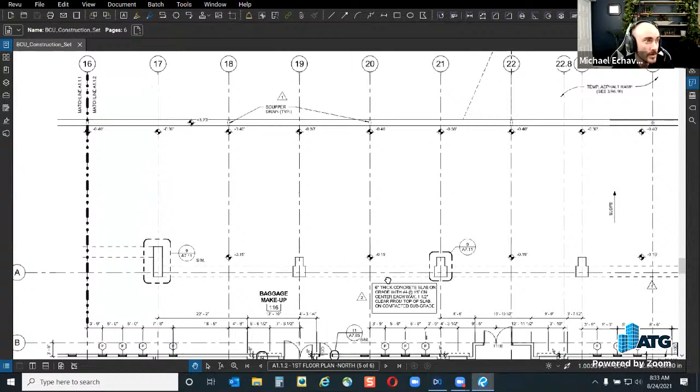But I've taken and compiled a bunch of questions, and I'm going to keep doing that as we go along, and Jason will be able to answer them and show his screen as we're going back and forth trying to answer these. Before we start on the survey questions that people have had over time, we'll leave it open for all of you. So if anyone here in YouTube world or Zoom world has questions pertaining to Bluebeam, or pertaining to who Jason and I are, or who ATG is, we can answer those too.

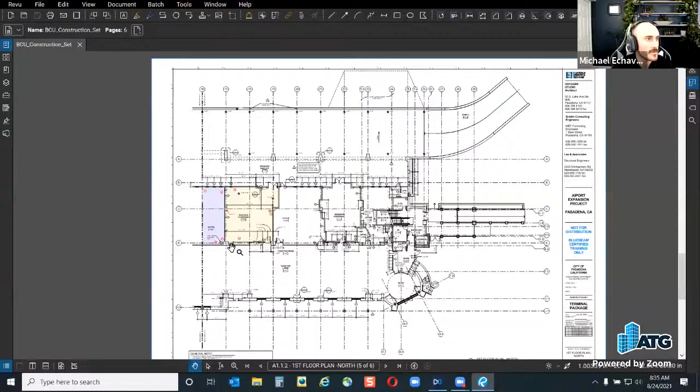I always recommend checking the DPI output right off the bat, since that's whatever the default DPI setting is. Revu is a more intensive writer for all of the metadata you're getting from your document. So check your DPI, try reducing it, see if it's not having that much of a reduction in the quality of the PDF. Usually I've seen people starting out at 600 DPI.

You can realistically get to about 350 on an export. That's going to reduce your file size a lot as well. So I would go and check the additional advanced settings from your export, from the writer software you're using. And then there are the other things Jason's going to go to.

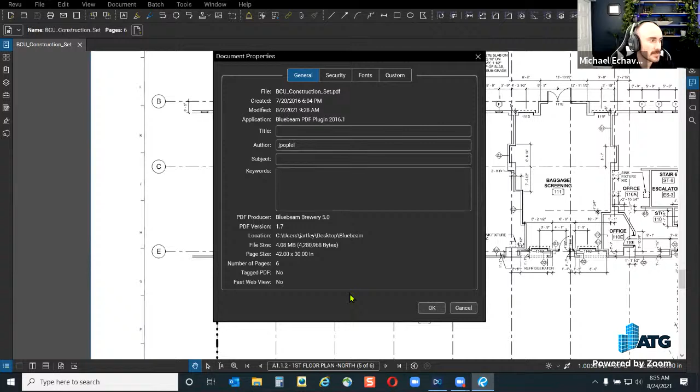So you were saying reduce file size and what else? Check the document properties. This is found under document properties. You can always hit Control D to get to this as well. And sometimes, make sure that it is an actual Bluebeam PDF. If you're using the driver, obviously it should be, but it's another thing to verify. You can also see your file size right here.

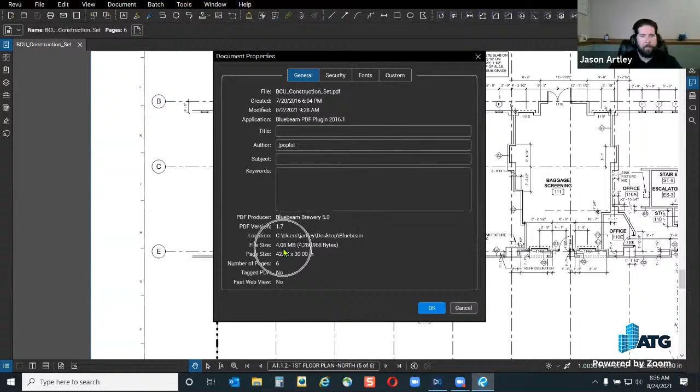All right, David, are you going to read them or do you want me to keep copying over? You keep copying over. I'm going to read David's question here. This is a good one because I don't know the answer. Let's see if you do. I'll ask you because you don't need to demonstrate anything.

Can spaces be set to capture information off of multiple sheets? So say if Office 115A here is on multiple pages, can it do that?

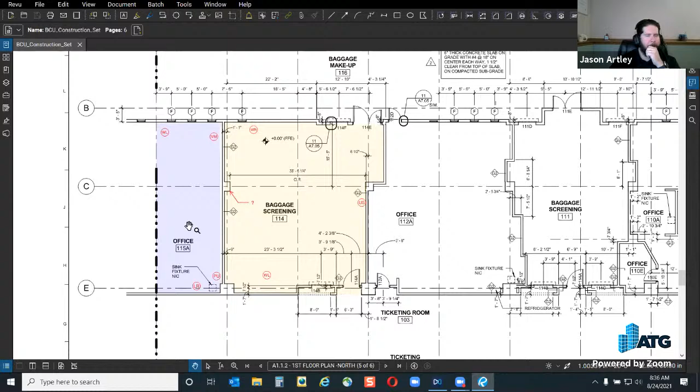I think you'd have to have it per instance. Can you have two of the same space? No, because I think even when you do the snapshot, it duplicates it.

So create a snapshot and then paste it, Control V. Just over here, it doesn't create another space, it just does that. But if you right click on it, what is it? Hold on, what are my options? Snapshot, create area measurement, delete, cut, copy, paste. Because usually it would also bring the space with it too, but yeah, it's the instance of that singular space.

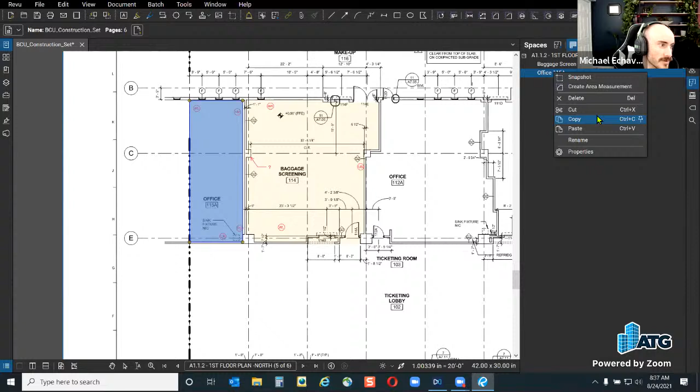It's not linked. You probably could if you knew JavaScript. Oh, there we go. So I did a copy paste of it, and look what it did - it made a one, and I don't think I can rename that to match. I can, look at that.

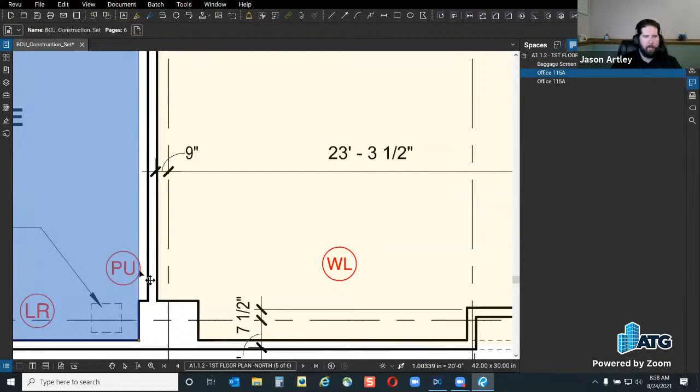But the data is not going to be - it would be two different instances in your markups list, right? Which is what we're trying not to do. Right, scroll down to your markups list. Let's see this. Hang on, I want to grab one of these markups if I can. I got a draw order issue here, or have I flattened this? What is in my markups list?

Somebody was playing - there it is. There, I moved it over there. Oh, so here, multiple spaces with the same name. It does show up the same.

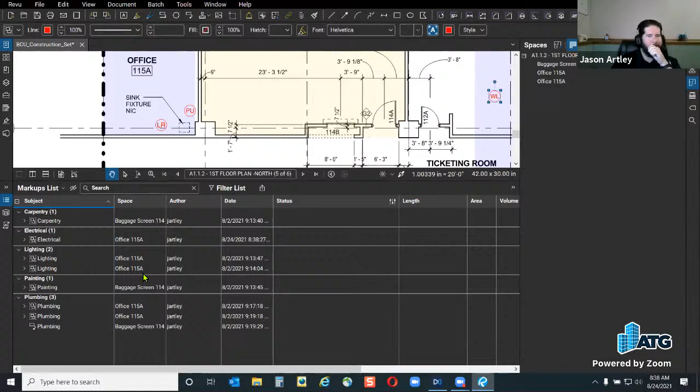So order it by spaces, though. Order it by spaces. Yeah, they all show up. They all show up in the same space. So do you think this would work on different pages? Good question. Well, if he wants them to be all together, it's still ordering them together, so yeah, it still works.

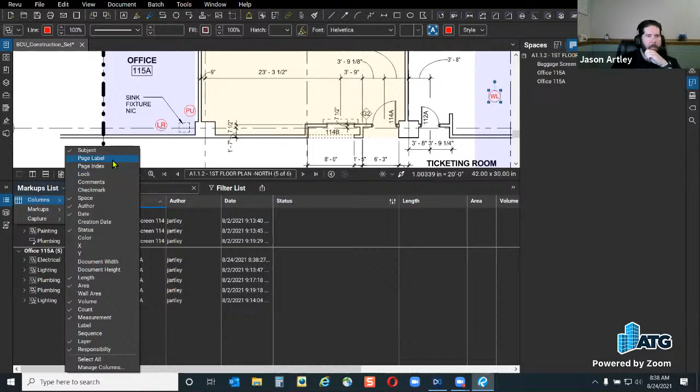True. Right, and then here, WL. Yeah, you just set your column for page index and the page label too, right? Then you can see what page it's on. So if you have multiple pages, then you can see it all there. Space name would be the same, which would allow you to work with the exported data. So if you're trying to have the same information under the same space, you name it the same, because it's still logging it under that same data.

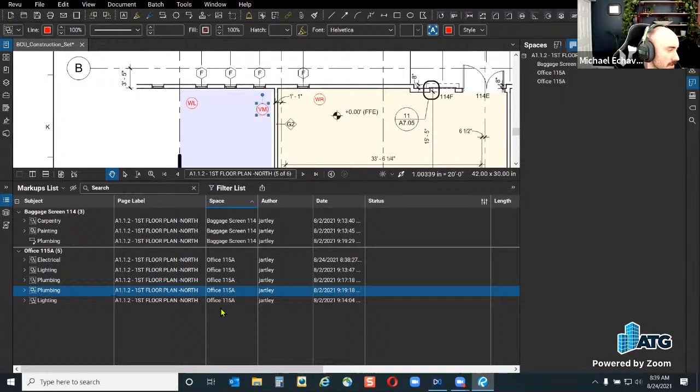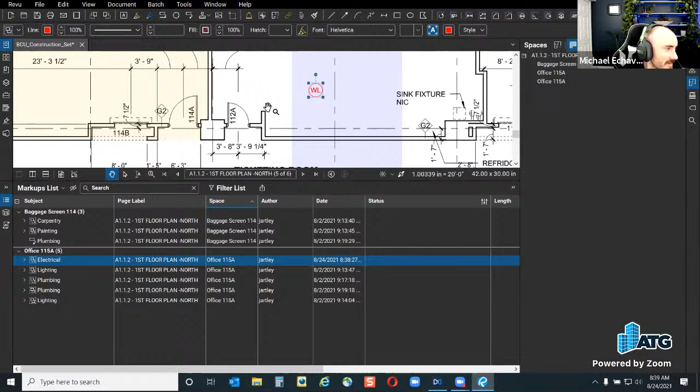Is that correct though? Scroll out. Is that - what was that? It was WL, right? What was that markup that you put in it? The WL, is it there on the left? What is that on the left, the WL? Oh, it is, yeah, it's electrical. I was looking for something with a W, but right, I know - that one throws me off. Wrong location. Wrong location.

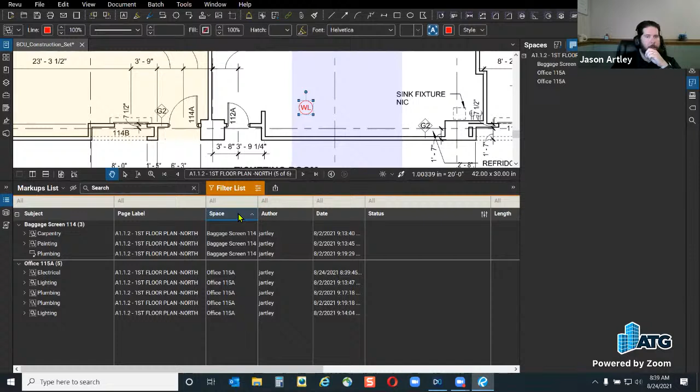So if you wanted to export the data and have it all filtered by these spaces, regardless of what page it's on, you have that filter capability here where you can just filter and choose what space you want. So if I filter, boom, only that space, and then I can create that summary.

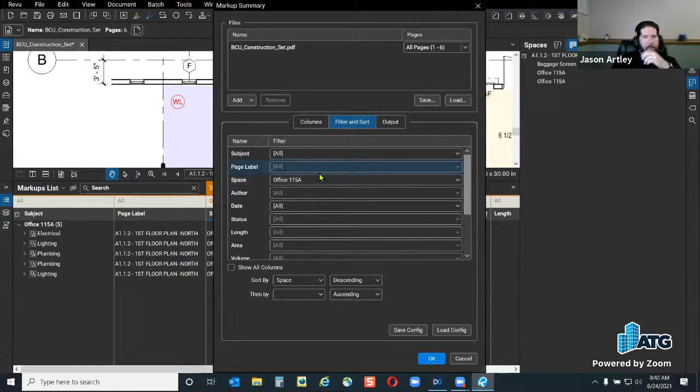If I'm doing CSV or PDF, let's do CSV for once. I can go through here, do what I need to do, include my markups, set my columns. I can turn all this off, and then when I'm filtering, it's already set to only give me the information for this office space. And there we go, so that's one way to do it.

Snapshot of the space was a nice trick too. You haven't seen that before? Oh come on, David, we do this all the time. Actually I don't — Michael does this because he works with spaces and rooms and architectural stuff way more than I do. Yeah, sometimes I'm jealous of that.

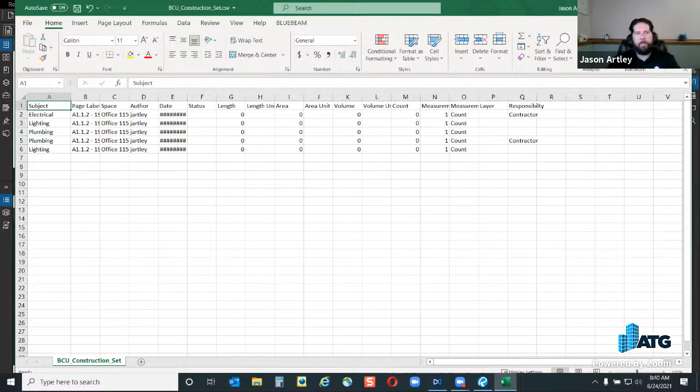Can't lie. The snapshot tool is great because you can then enlarge that area. So if you snapshot it and you want to make an enlarged area plan of something, you can just snapshot it and then make it larger than it was by extending it up. So again, it's a great tool.

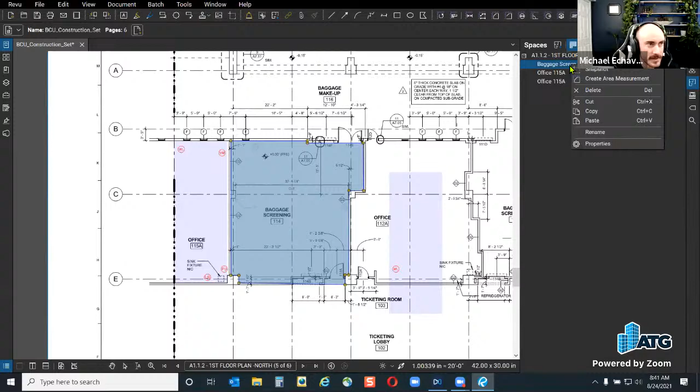I'll grab my baggage screening snapshot, and then I'll go to another page where I have a little bit more real estate. Do I have a page with more real estate? Probably, just insert a blank page.

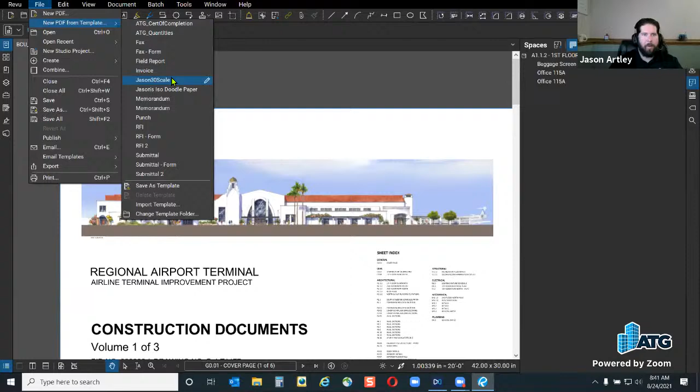Oh, let's do this — new PDF from template. Jason's got a 30 scale. Boom, I'm going to drop this right in here. Look at that — now I can have my full detail.

Yeah, and you can scale enlarge this. There you go. And since I have measurements here, I can still calibrate and scale this accordingly. But this template that I use is already set to 30 scale, so I could have just dealt with it.

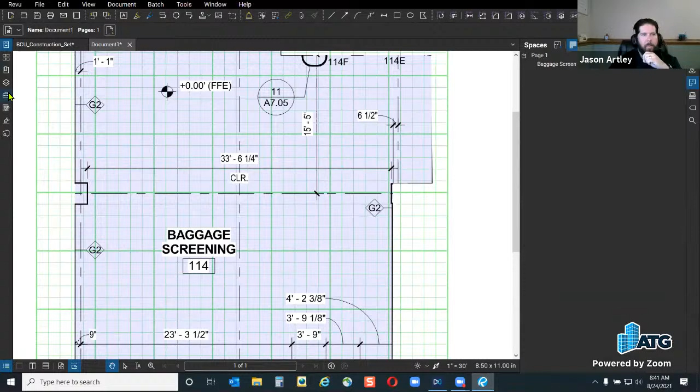Now I can go make whatever I want as far as other doodles or detail, or inserting fun things like people, because people like to walk around in baggage screening and they're usually in my way when I'm trying to go get my bags. Funny how that works, right?

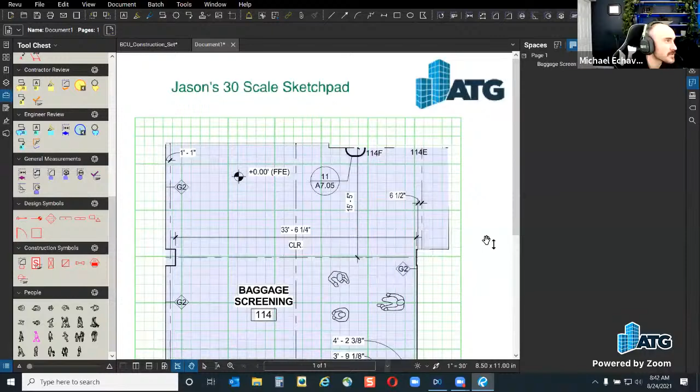Okay, first one is: Control K menu — what does it all mean? I don't know. Okay, this is going to be a fun one.

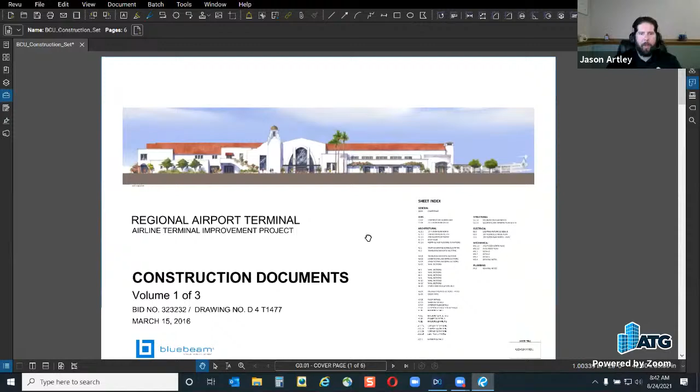Ready? Control K — anybody know what this does without cheating? All right, Control plus K. Here we go. Oh, it's just preferences, man. I would've thought that one was Control P. Again, I really try not to learn hotkeys because I will always use hotkeys, because I'm that guy. But if I'm using hotkeys, that's not explaining what I'm doing.

So we just opened Pandora's box. Let's go for a trip down the rabbit hole, everybody. All right, hands and feet in the vehicle at all times, make sure your tray tables are properly stowed. This is the preferences, and there's a lot in here. And for most people, you don't have to touch anything.

So I'm going to do this in two ways. First way, I'm going to show you the things that most people should mess with. Then I'll stop there, and we'll come back into it and go deeper down the rabbit hole. All right, so when you first open your preferences, you're going to start on the general option, and then you have more options here. So in the general tab, what do you call these tabs?

General section, and then options, document, navigation, grid and snap, and spelling. I call them tabs. So in general, on options, the first thing that I recommend people do is change your username — so 'Jartley,' that's sort of a nickname, it's my thing. If I put my actual name there, this is what shows up in the markups list.

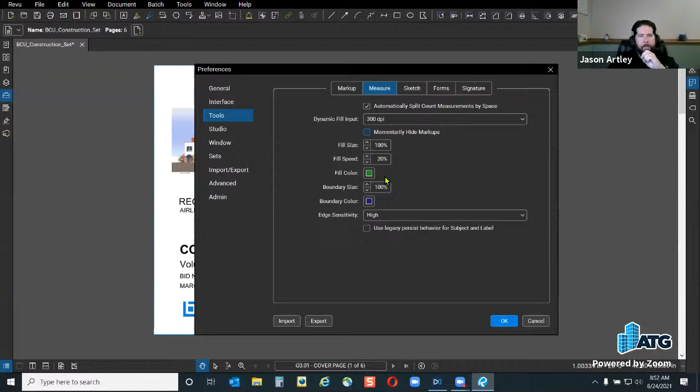Fill color, green, boundary color. Some of the stuff is kind of silly. Sketching, and then our forms. Again, forms is an extreme only function.

Here in Studio, attempt to check out files on open. Don't do that one, I don't recommend that. Enable flashing effect, this is a good one, but if you're sensitive to flashing, you can turn that off. Nice of Bluebeam to include inclusionary options.

Open and save from toolbar only. Force proxy views, I don't know what that means. Open project documents in split view. This is a toggle, right? So when you open a project, it will say, do you want to open in split view? So if you set this, that option won't pop up.

And then here you have your servers.

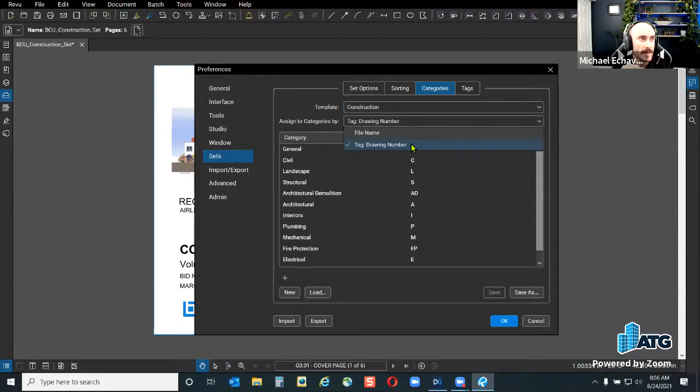Create your own categories—again, save it, export it, share it with your team. Everything ready to go. You can export these, and these categories are specific to your sets, by the way. This is only for sets, when we're creating sets, and that's virtually combining—it's proprietary to Bluebeam.

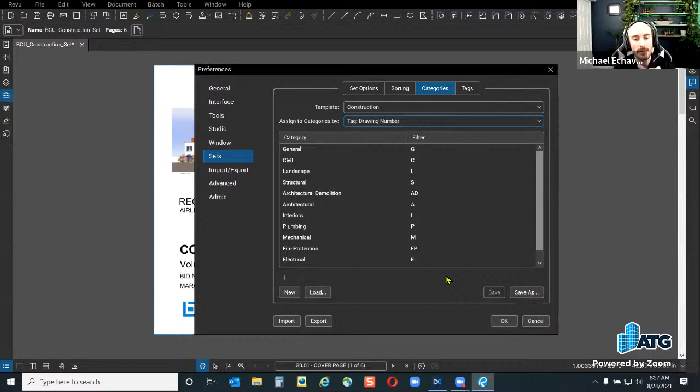It's virtually combining your PDFs into one set, but they're not really together. Majority of the time I'm having clients do this is because the set is too large—file size is too large, and it's hard to render a lot of PDFs when we have, I don't know, over 250, maybe 300 PDFs. How can we separate them out as individuals? Doing sets is what I always recommend, and that's how we would do that.

So once you have this set up the way you like it, all you've got to do is hit save as here, and that will create an XML file, and then you can have that set. Here's a construction set that comes with Revu, but if you wanted to make one for your company standard, you just drop it in here. So my ATG one is there, and now I have that template capability. If I were on the receiving end of this, all I would have to do is click load, grab that XML file, and that category would show up.

Bookmarks, again, are grabbing live data, or your data from your labels. Sets is completely different from your bookmarks.

Sarah's got a good question, and I'm looking right at you—you better get your screen ready because you're going to be sharing. Is there one in the Q&A? I have this covered. I could do it, but Michael's the man, so I'll let him show his passion and expertise on digital dashboards here in a second.

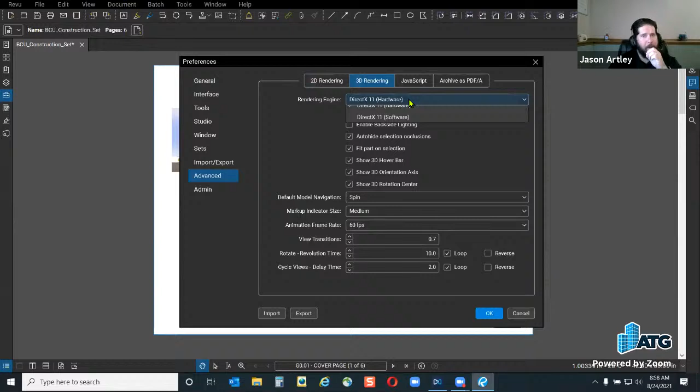Advanced—now this is one we've used before that has come up: 3D rendering. What's your rendering issue, or are you using hardware or software? Maybe 5% of people would need to get in here.

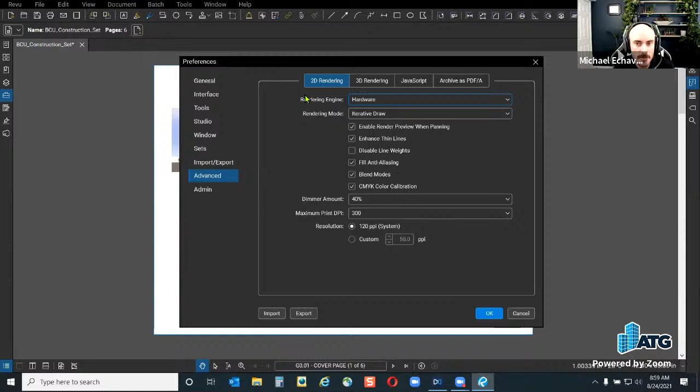Yeah, there was an issue—Kyle brought this up the other day, a known issue with, I don't remember which one it was, but yeah, it was like 5%. He was saying that had to be switched from hardware to the legacy setting. So yeah, boom, right here.

And then admin, obviously—here's your reset, here's your backup. So at some point today, probably, I will hit reset, set Revu back to default, get it loaded up, get it all set the way I like it, and then I'm going to back up my stuff, because I always forget.

So that's on my to-do list today. The preferences are very handy. There's a ton of things in here that can help you do whatever you need to do inside of Revu.

Now, I wanted to stop at this one: full screen crosshair. You know who you are. If you're an AutoCAD user who likes the full screen crosshair, pointing at me. Sometimes. Is that you? I'm getting better, I'm getting better. Old habit, I can't stand it. Well, I'm old. I've been using AutoCAD since before. We don't use the word old, we call it seasoned. But I'm gonna have to disagree with you there.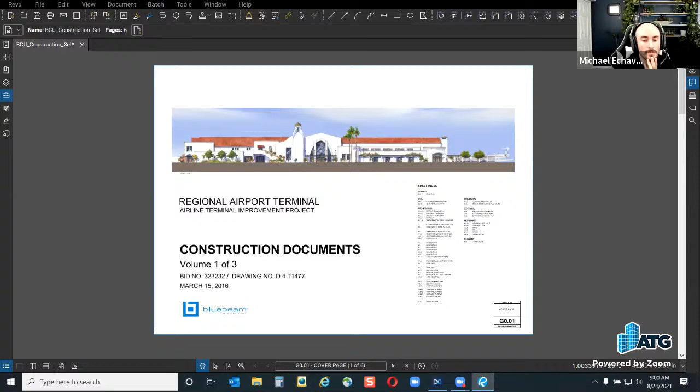All right, Michael, is our website down too, Jason, right now? I don't know. We're having some technical issues. So let me share my screen. I would recommend going to our resources pages. It is slow at the moment. Okay, that's probably why, I can't copy this. Oh no, there we go, it was just slow. So here is digital dashboards and how to create them. I put that directly to the ATG events. I'm sorry, I'm sending that to DJCJ. I meant everybody, no wait, everyone. There we go, there you go.

So in the Zoom chat, Michael posted that link. This is a white paper we did on digital dashboards. So if you're looking on how to create them, there are some things I didn't add, so if you need more details, feel free to email me or us here at ATG. But this is a great read, it's free, so by all means check it out. If not, there's a video on digital dashboards as well that I did for one of our webinars, on our YouTube channel. If you haven't visited our YouTube channel, I highly suggest it.

So if you go to YouTube, you can go to ATG USA, and from here you can look at the titles. You could go to all videos, but if you look here you can see titles, and there's Bluebeam right here. You can go through and look at all of our Bluebeam items, or any of our Morning Coffee Reviews, because we've talked about it in there too, but I will give you a run through.

It really depends on where we're going to be creating our dashboard. I prefer the method of creating it in a project so that we can add project partners to the studio project, and we don't have to worry about where the PDFs are being stored. For example, if it's stored on the server, someone from exterior trying to gain access to our dashboard won't be able to open the documents. I did have one user, I think it was somebody in here, who wanted to do it to a Google Drive, and you can link to a Google Drive as well. That would be another option because it would pull up the Google Drive. But that person probably has to have an email, if I remember, to use Google Drive in that manner in order to access those files.

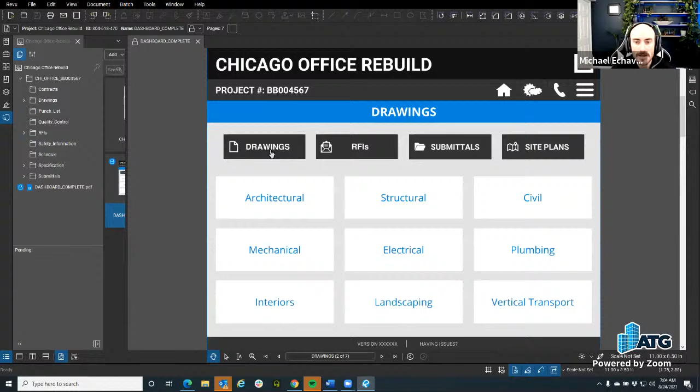So maintenance isn't that hard once it's started. Once the inception is done and it's created, people can go through and look at it. You're jumping through to folders versus the PDFs, so these can be updated if there's revisions, or it's checked out for a session and brought back into the project. We don't have to worry about that because it jumps to a folder versus the PDF itself.

One other question may be, well, what if our project partners don't have a license of Revu? They still can get access to Studio Projects for free. They just need to download the software, and even if it turns into view mode, they can still get full access to Studio Projects in terms of looking at the PDFs. This could be for any document.

If we're bringing back what Studio Projects is, it accepts any file type except an executable, which I learned recently. So it could be an Excel file, and if they wanted to open that up, there can even be the URL, which we've talked about, since it has a browser in it. So you can figure out what the weather is specific to the site.

These pop-ups are one thing I don't talk about in the dashboards. If you want to, we can offer some training on it. That's using JavaScript on how we can build out information from here as well.

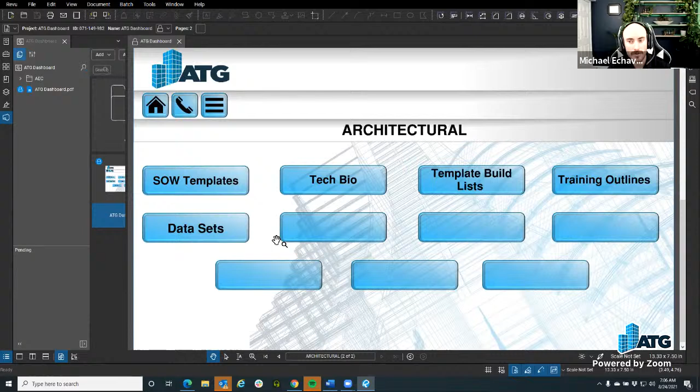And this doesn't just need to be for projects, it could be for internal use as well. Maybe we need to go through and get access to internal training documents. We have this for our team too. So if you want to go through and look for specific things, you can do that. Like, here's home, and we're looking at the architectural realm, and maybe we're going to look at training outlines, or SOW templates, or data sets. Let's go look at our data sets, and here's some data sets we can gain access to as well.

It's a really amazing workflow. It's kind of simple, but at the same time, as Michael said, once it's set up, it's easy to roll with, and most people can navigate this without having issues. So even if you are tech savvy, it's nice to have the easy button. I just want to get in, grab my stuff, and get out, and not have to think.

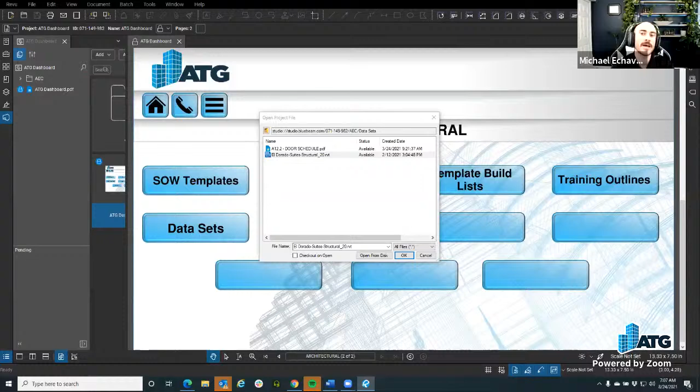Question here from Jason: can someone invited to the dashboard make markups if they don't have Revu? For the first 30 days they can, because if they download the license of Revu, it's a full license of Revu for the first 30 days. And how it works in a Studio project is a check-in, check-out basis, so they have to check out the PDF like a book and then check it back in.

Now, you can check a document—actually, I'd have to try that. I don't know if that works if you don't have a license of Revu, whether you can still check it out. I'm thinking you could probably do it in Excel if you have Microsoft Office Suite, because you could check it out and just work in whatever is yours. But you couldn't mark up a PDF from there because you don't have all of your markup capability tools. Yeah, I don't think that would work. Yeah, it doesn't work, I know it doesn't work.

But you can in the session. So if you wanted them to mark up, you could say, hey, we'll create a session from our dashboard, because you can do that from here. You can have your files, which we talked about last week, I believe, right? You can create a session from your PDFs in your project, which could be from your dashboard. You could create your session, and then in the session, if they don't have a license of Revu, they can still mark up.

Projects have limited capabilities, sessions have full capabilities. And I say that with a big asterisk, because regardless of license status, not every function is available in a session. But if you don't have a license, or want someone without a license to make markups, put it in a session, not a project. Be aware that's not necessarily why they limit things, but there's a caveat that they remove some features. They want people to collaborate even without owning a license, they don't want to tie your hands behind your back. But it's a give and take - we can't give everyone the full license for free, they have to pay for it.

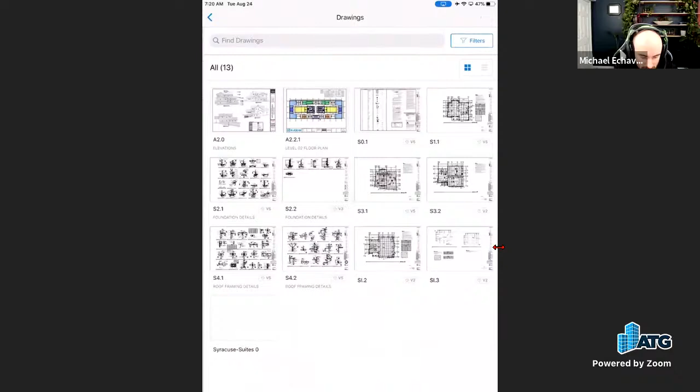And again, there is no join from here. So at this front screen, I can't go and join a project. I can remove a project, but I can't join from here. So you have to log into your URL to officially join the project because there is no join from here, unfortunately. That's the only downside.

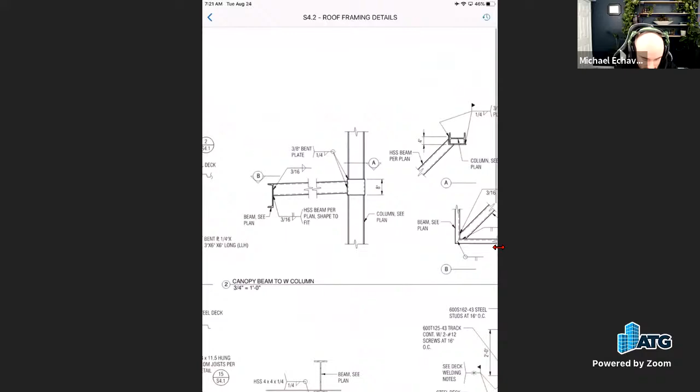But I can go in and go to file share, and then I can look at my PDF. So if I wanted to go through and pick up one of my PDFs, I can zoom in and look at this while I'm out in the field. No, you cannot mark up - if I were to want to mark up on these PDFs, I would be utilizing a session, which you can also have the free iPad app as well, or the paid for iPad app, or Surface Pro. You can use a full license of Revu as well.

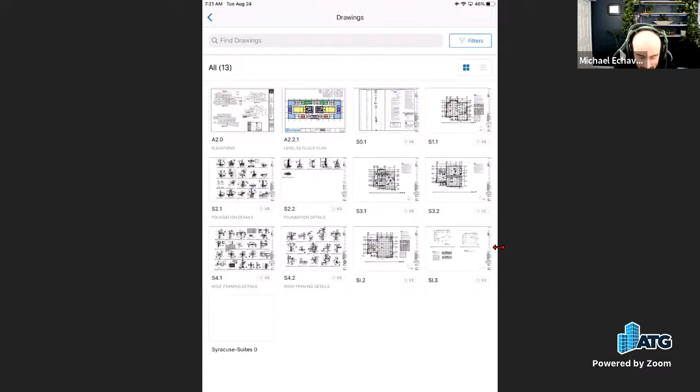There are differences. Jason said he's coming out with a blog about an iPad app deployment. But again, you can go through here, and if you have any revisions - say you downloaded any of the older revisions - you can actually see them in here as well. That blog is still yet to be completed, and then once it's all done, it'll go through our marketing cycle, so it'll be up in the next month or two.

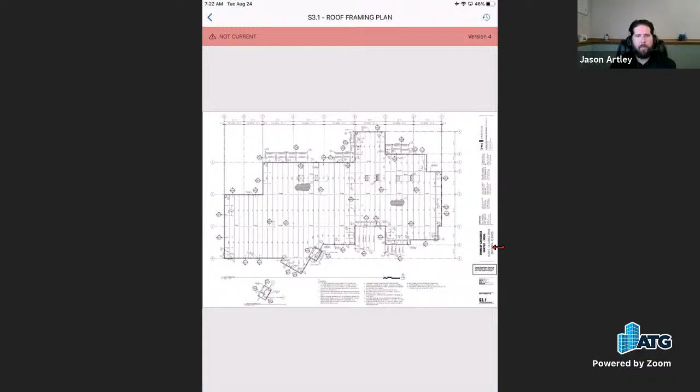What do you use to cast? This is just casting from Zoom. So up here on the top right, you can see this mirroring. In the share button in Zoom, there's an iPhone, iPad you can share from, and it's casting from there. I'm guessing it's Bluetooth, or just Wi-Fi picking it up. Yeah, probably Wi-Fi. So it's pretty cool, I just learned that a couple days ago.

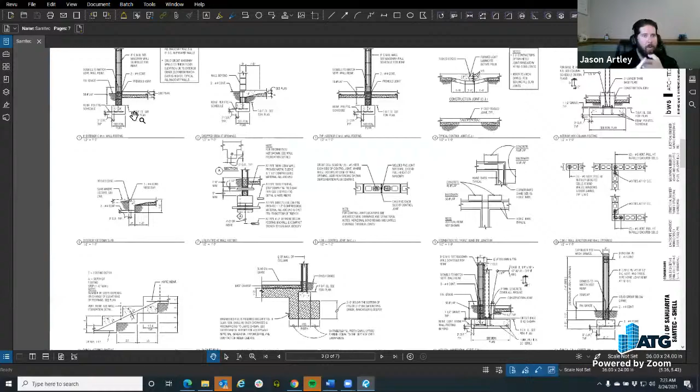Drawings works anywhere you have any web browser. Drawings will work with... Sessions will work with an iPad or any Windows-based tablet, and the Drawings app itself is for Android or iOS. So not everything is compatible. There's no Bluebeam for Mac, etc.

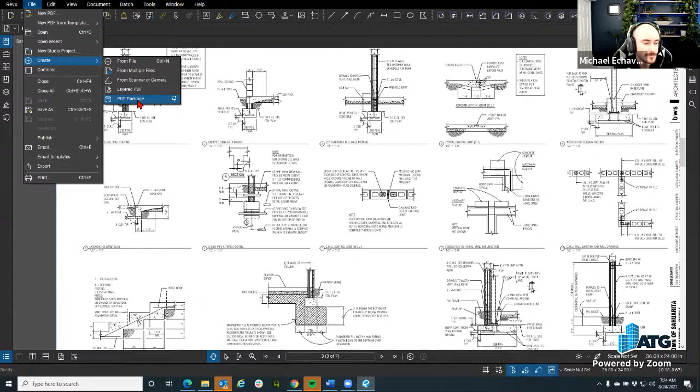Anything else to add to that one? Nope. When you do a summary of your session, you do have an option to not use that package report too. Are those shareable?

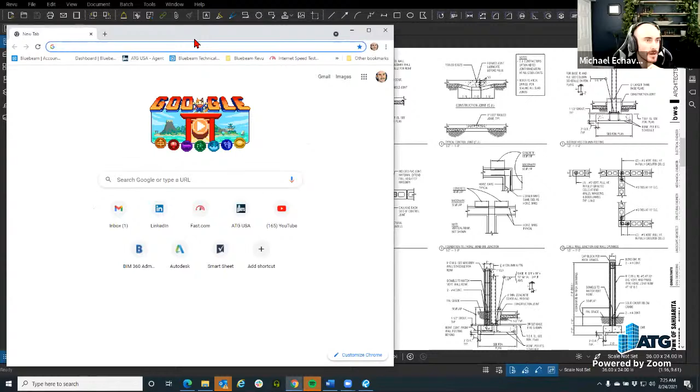Yes, it's an extension of .pdf. I don't know if it's going to open up in Revu or in a different software, and how it's going to interact. That would have to be tested. I've never done that, so if anyone has experience, feel free to share.

Yeah, um, she'll get to you, Beth. And then...

Sarah said the PDF packages are not allowed in the drawings portal. Correct, because it's just PDFs.

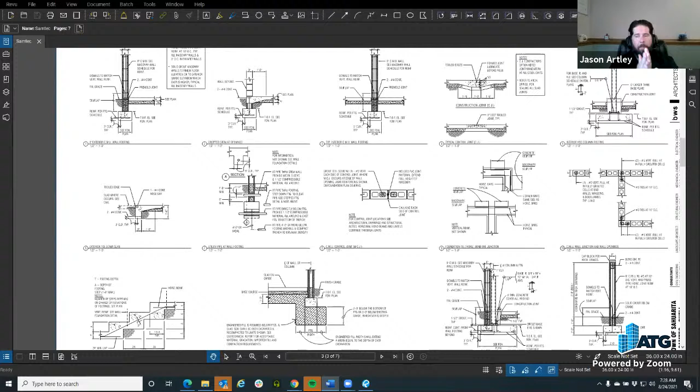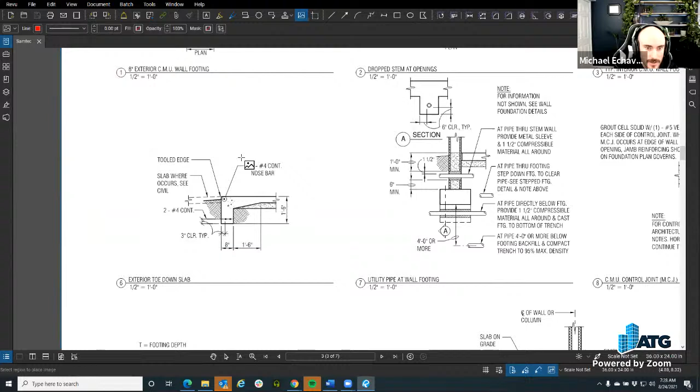Next one was placing photos in Revu. Is there a way to tuck them under the line work? You can make it transparent - that's how you'd bring it in. I have a transparent logo here, but if I go and bring it in, what is the opacity? That would be the fill though.

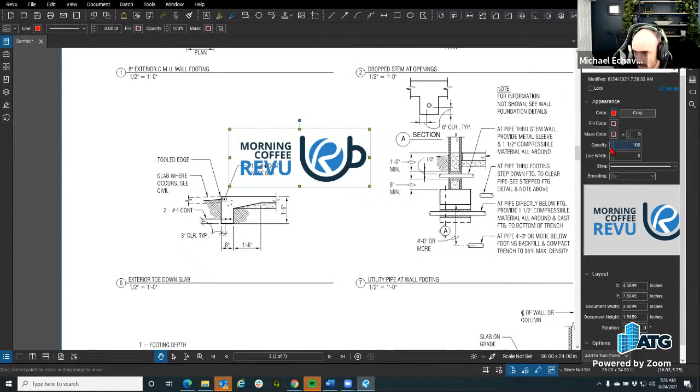I think there's a way in properties. You might be able to snapshot that area and then do a draw order. So you're thinking snapshot? There's an opacity right there, 100. But I think that's the fill, right? No, it's the opacity of it. So that's kind of showing it.

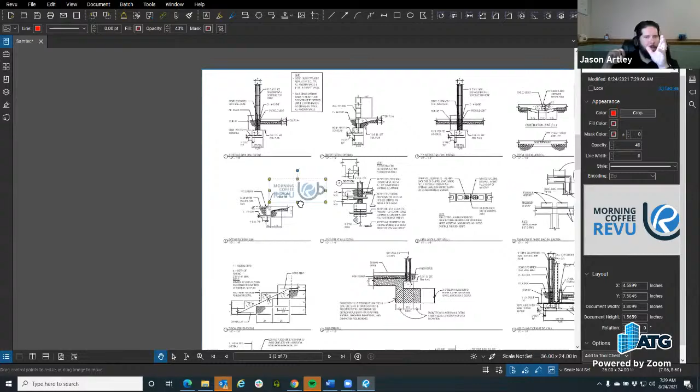That's one way to do it. But even if you send it back, it's not going to work because it's not seen as... that opacity trick would work pretty well. I'm thinking of using an aerial photo from Google Earth or something and being able to add this to my PDF output without having it in my CAD drawing, which makes the CAD file larger. This could be a nice little trick.

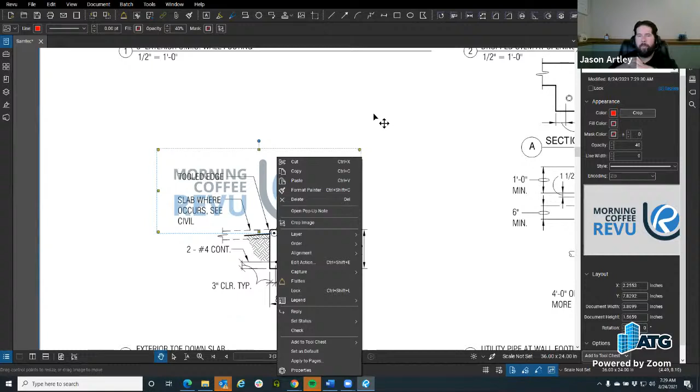I was hoping they'd give me a stamp option where it's like a blend mode, but there you go. What if you used that image and created a stamp from it? I think it would depend on the type of image you're working with, and maybe that workflow is a bit ridiculous. But wouldn't this detail be cool if it actually had a picture of concrete, dirt, insulation, or fill? That would be a neat way to level up your details.

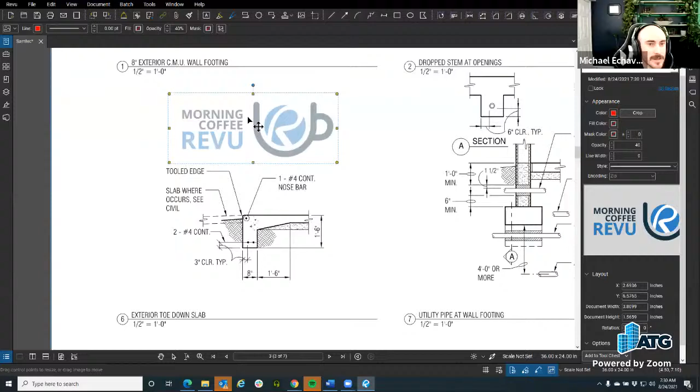I guess so, but that would be assuming everyone uses PDFs versus printing out the document. Another way is, instead of putting the photo there, you can attach your photos to the markup. If you right click and go here, you can add an action - oh no, it's not an action, it's an actual image. So from here I can go down and capture or do from file, and grab my images.

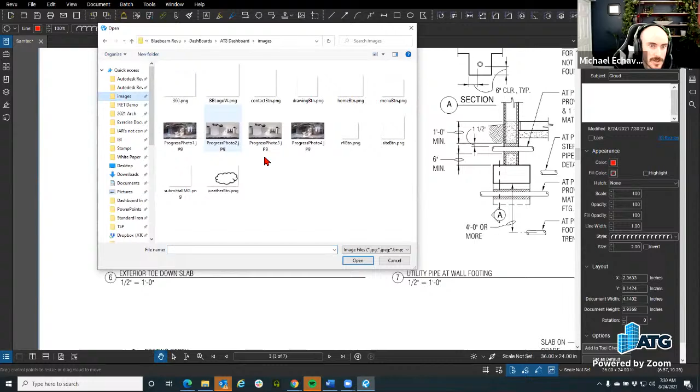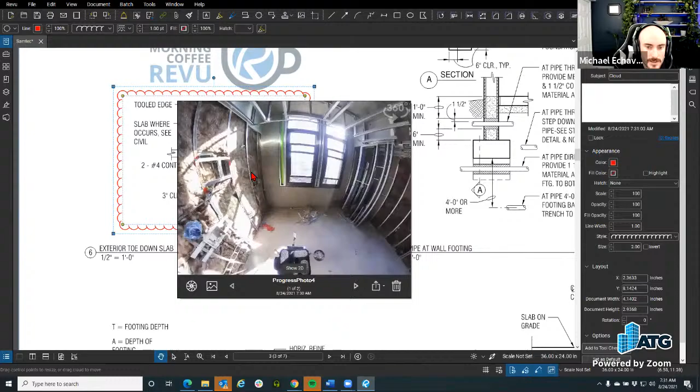And you could do 360 photos, by the way, if any of us use those. I'm going to add a 360 photo, and also a random photo I have from camera roll - did this one the other day. So here's this 360. Whoa. You can add from it if you're able to do 360 photos. I downloaded this from Flickr from this gentleman, a bobcat on top of our trees.